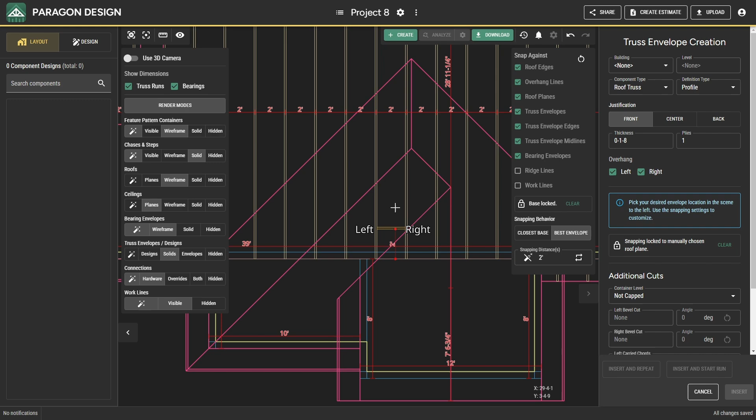Insert a truss again using either the lock to base method or snap against the bearing envelope, whichever works best for this situation. Next, add top and bottom cuts. As you can see, cuts can also be applied directly in layout mode. Once done, recalculate.

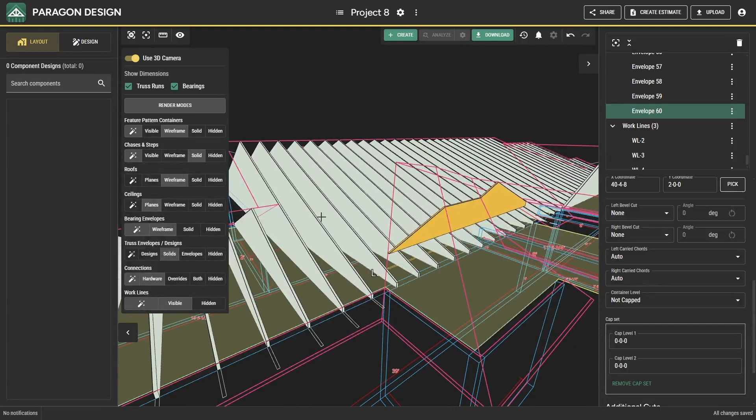Now check the 3D view. That looks good. Just fill in the missing areas here and the profiles look correct.

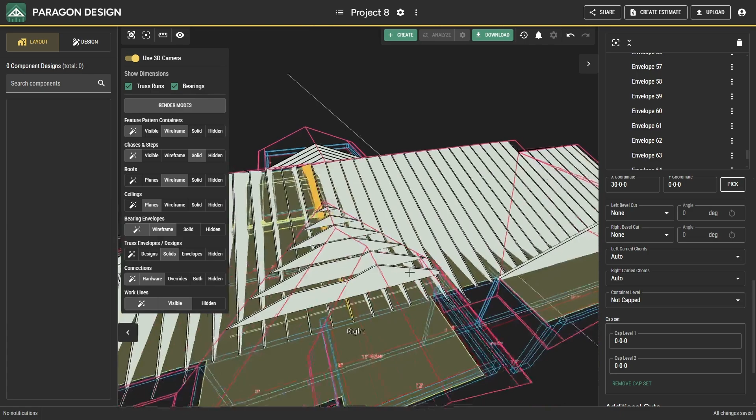There's one more valley truss run needed here, and then we'll be ready to move forward. Just like before, repeat the same steps in this area.

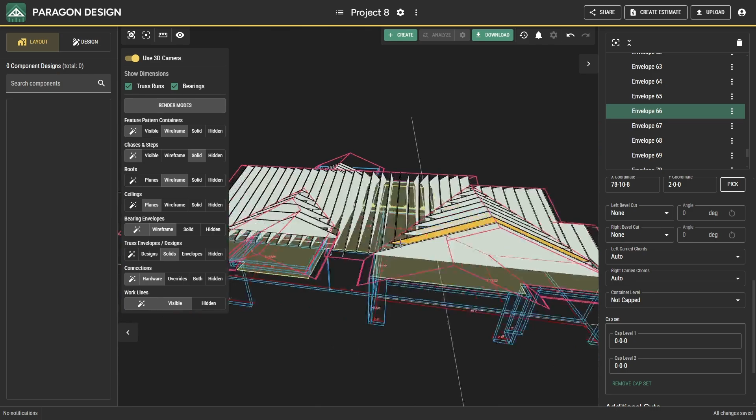Let's do one final check on the valleys. Looks like everything is correct. We can now move on to adding corner sets. To do this, right-click and select Add Truss. Before creating the corner set, add a hip girder truss first.

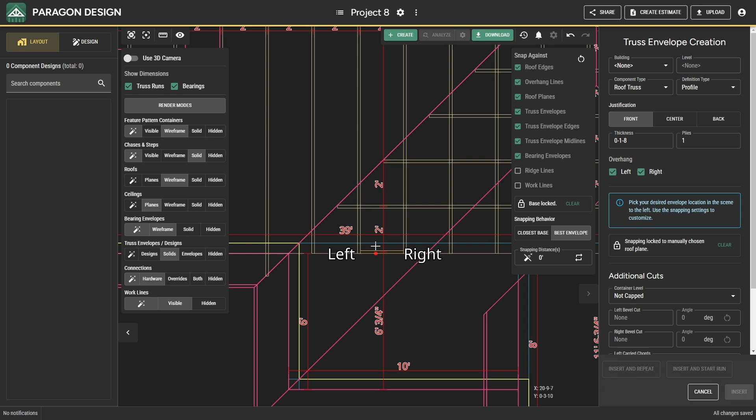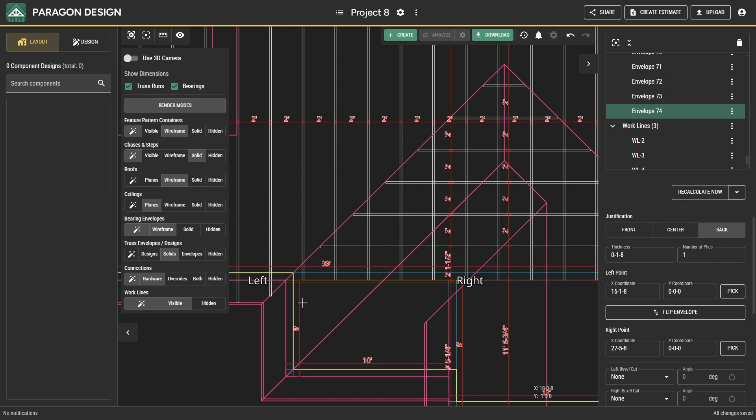Adjust the span to the correct length. Then, right-click on the hip girder and select Create Corner Sets. Next, select the two planes that define the corner set. Once selected, the corner set is generated.

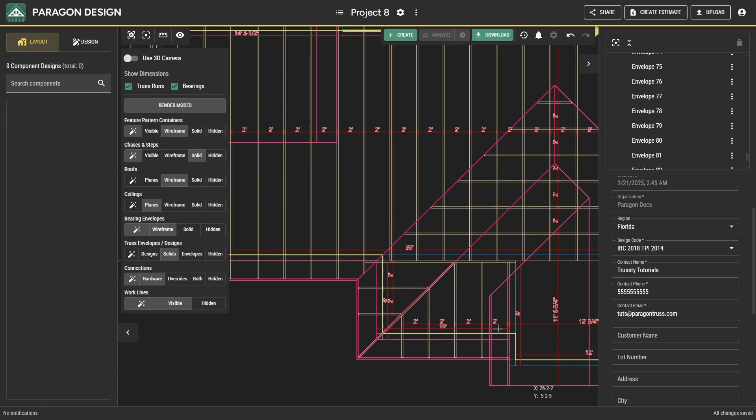To complete the trusses, fill in these missing areas. Make the necessary span adjustment on this truss, and now the corner sets are successfully added. Now check the 3D view to ensure the profiles are correct. Examining the profiles, everything appears to be right.

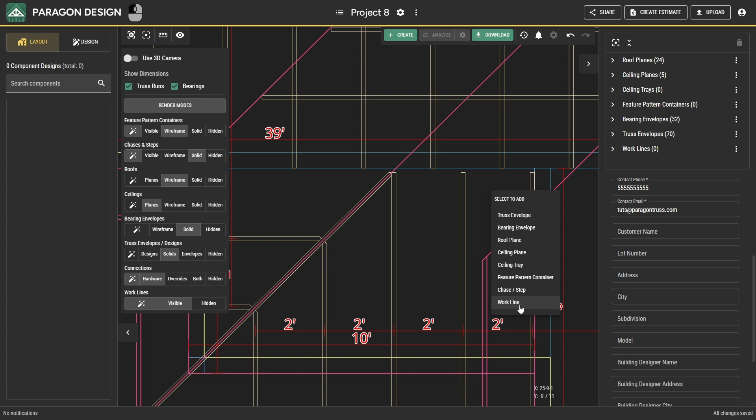However, the hip girder here might overlap or cannot properly bear on this beam. We could resolve this by deleting the girder and extend these trusses so they bear directly on the wall. The result should look something like this.

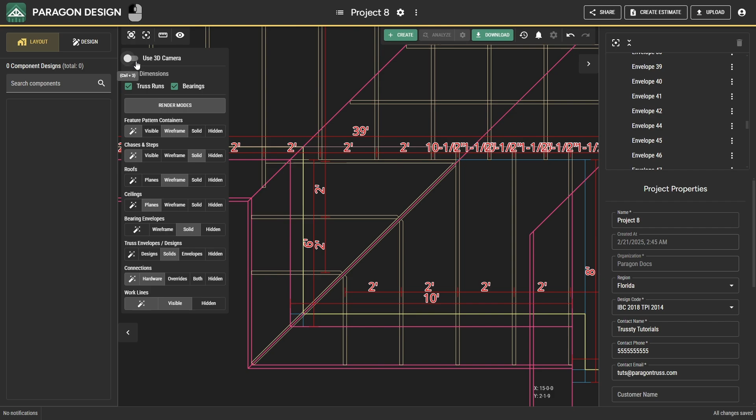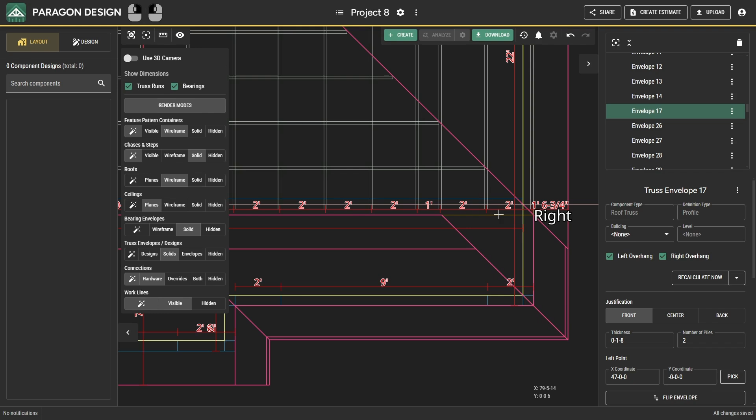Now, follow the same process for this side. Since there's already a girder here, simply right-click on it and select Add Corner Sets. Select the two intersecting planes to generate the corner set. Fill in any remaining areas, then place a truss girder here.

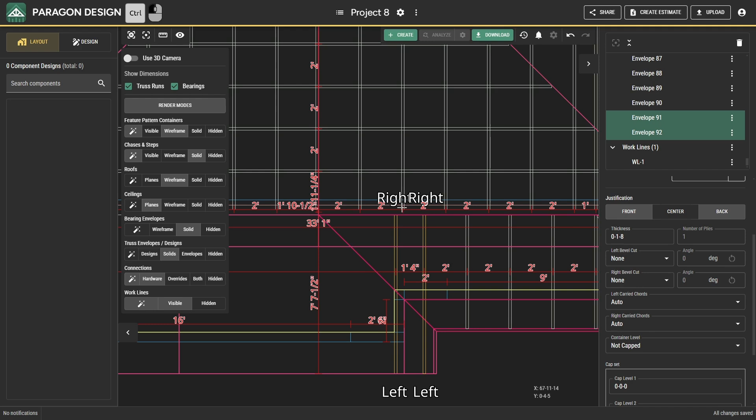Ensure that both trusses share the same left and right points if you are adjusting the ends using a bounding work line. To align them, simply flip the truss envelope to align their endpoints. Now, both trusses are aligned properly. Adjust the span of these trusses as needed. Remove any existing work lines to prevent unintended extensions, add a bounding work line, and recalculate.

Now, let's complete the remaining trusses and make any necessary adjustments to finalize our layout.

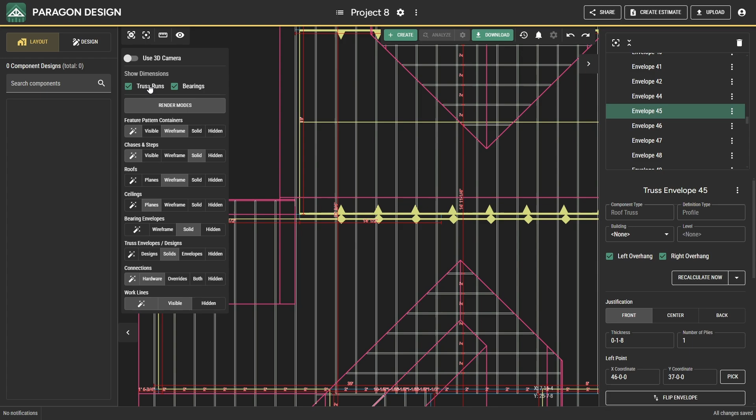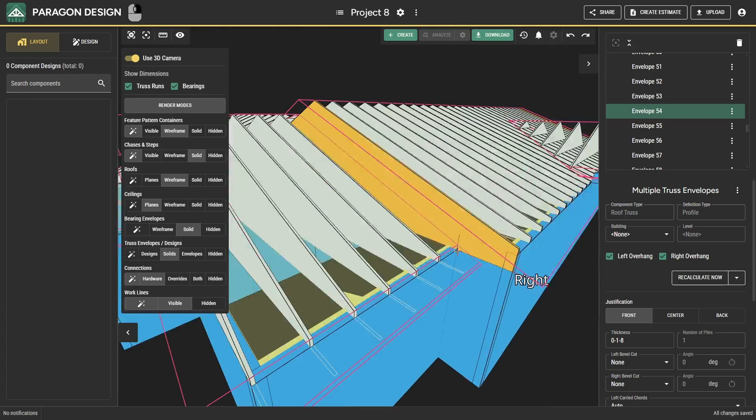Since the overhangs can be adjusted during the design phase, we'll leave them as they are for now. As for these gable trusses, we'll refine their profiles once the rest of the trusses are designed. This approach provides greater flexibility in managing various levels of layout complexity. Doing one final check.

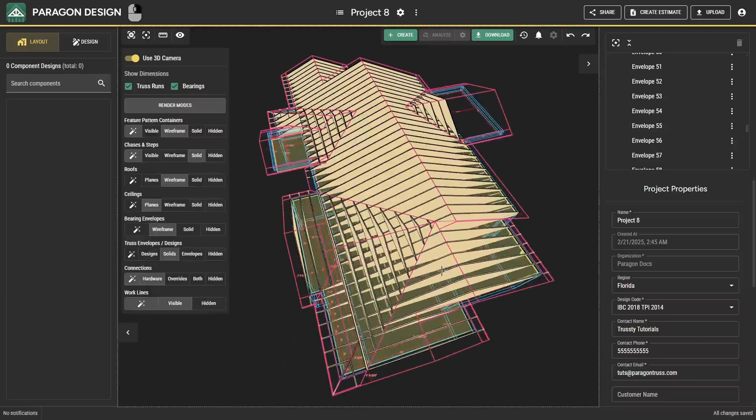Everything appears to be in place. If your project requires piggyback trusses, here's how to add them. Select the trusses that need a piggyback section. On the right sidebar, scroll down to the Cap Set section. Under Cap Level 1, set the cap height to your preferred value.

Since this height is referenced from the zero elevation, you'll need to add the top height of the wall where the truss envelope bears, plus the desired overall height for the base truss. If an unusual truss envelope appears, simply adjust Cap Level 2 to a higher elevation to correct it. Now that everything is set up properly, we can proceed with designing all trusses.

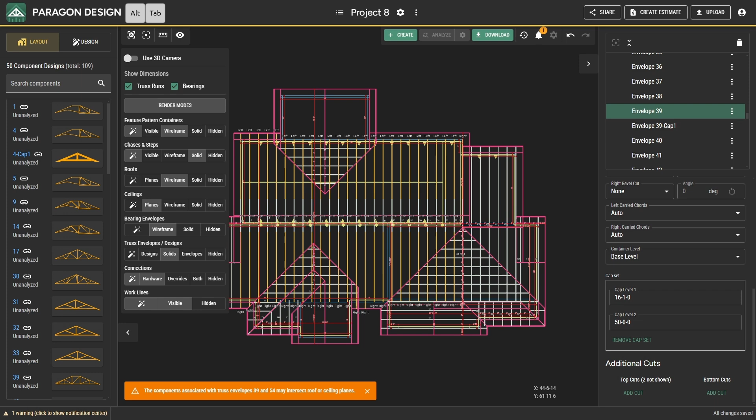Remember this error for later, as we'll address it in the next steps. For now, switch to the 3D view to check how the designs look. To view the truss designs, click Designs. Here, the trusses have automatically generated webbing.

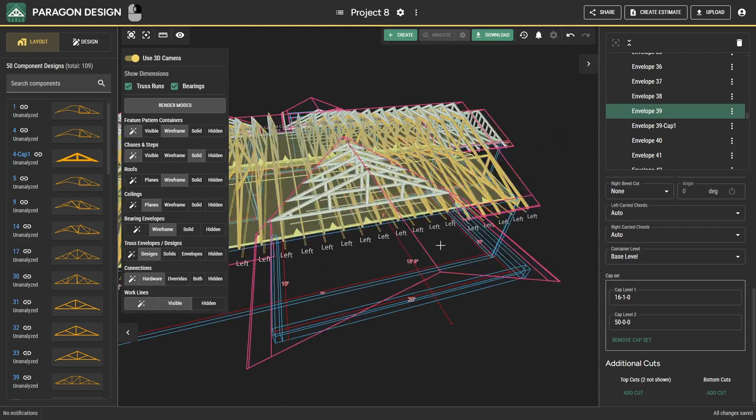These configurations can be adjusted in design mode, so be sure to watch the tutorial on how to use Paragon's design tools. The valley trusses, cap sets, corner sets, gables, and sloped bottom chords are now visible.

Now, we'll fix the profiles of these two gable trusses. To do this, duplicate an existing truss design that matches the problem truss and link the component copy to it. Next, ensure that the endpoints of the problem truss and the reference truss match. If they don't, adjust them as done earlier.

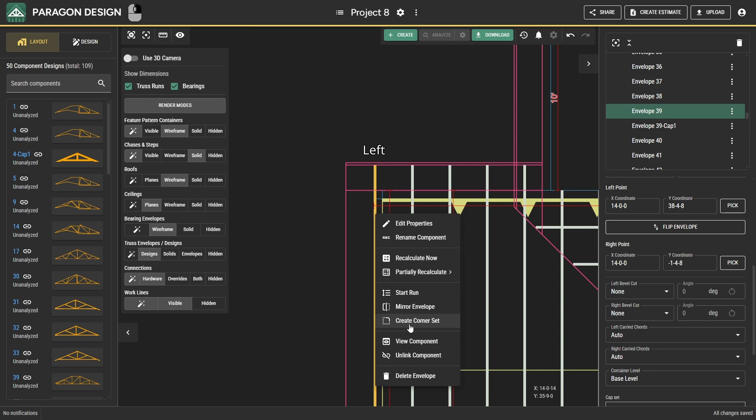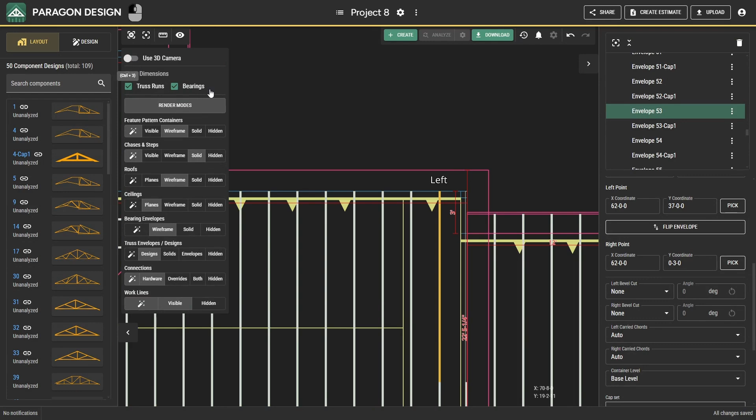Next, unlink the design of the problem truss. Looking good? Verify that the endpoints are now matching. Let's unlink this one as well. Open the reference truss that will be used to copy. View the component design and make a copy. Take note of the component name for later use.

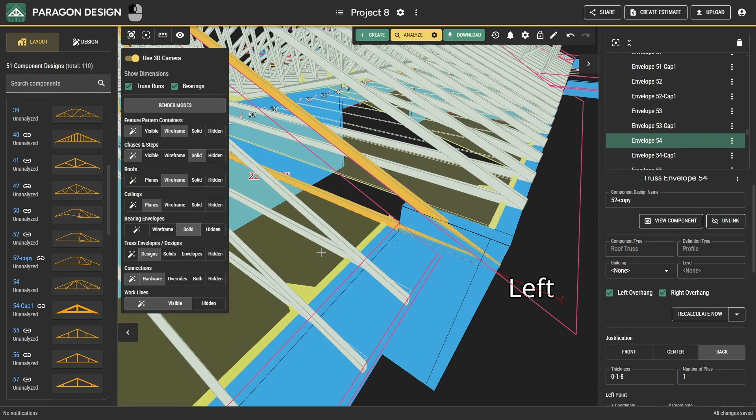Now, link this copied design to the problem truss. Click Choose Existing Design and select the copied component. Switching to 3D, the design has been correctly applied, but the elevation is incorrect. To fix this, add a bottom cut on the truss envelope, cutting against the higher flat ceiling plane.

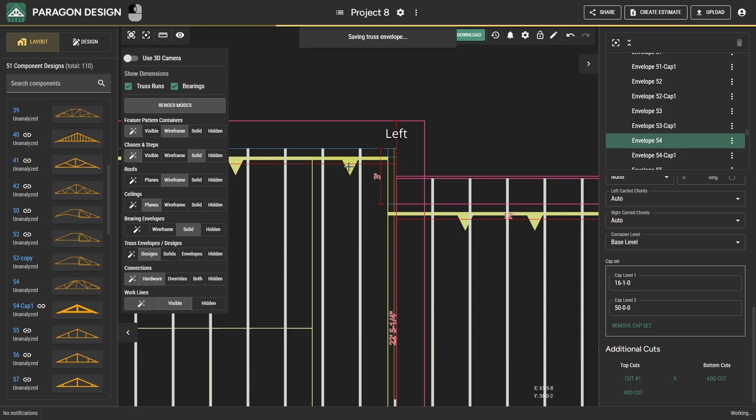Unlink the truss again. Add a bottom cut. Click on this plane, and then relink the design. Now the profile looks correct.

Apply the same fix to the other gable truss. If the webbing differs, you can create another copy of the design and link it accordingly. For now, we'll simply link the same truss since modifying component designs in design mode is discussed on other videos, which you can find in our channel and documentation page.

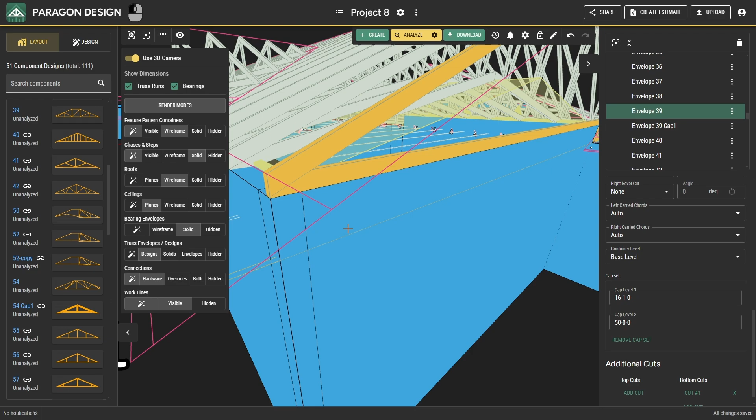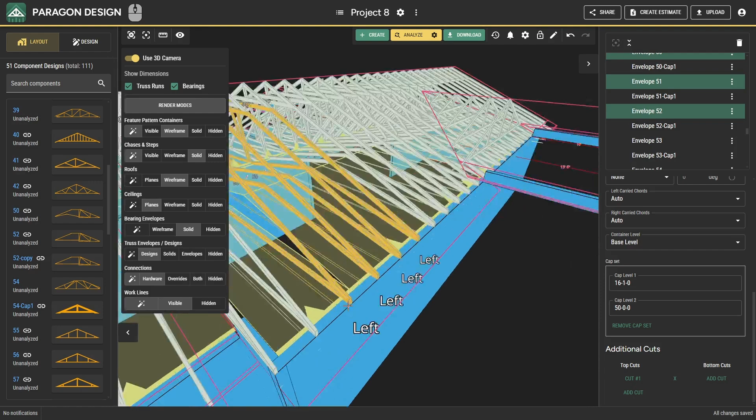Now, I will briefly go over how to fix overhangs in design mode. Open the component design, and since this is the left end, adjust the left overhang. Click this button and select Adjust Overhang. Checking the 3D view, the overhang is now correctly applied. Let's continue reviewing other areas.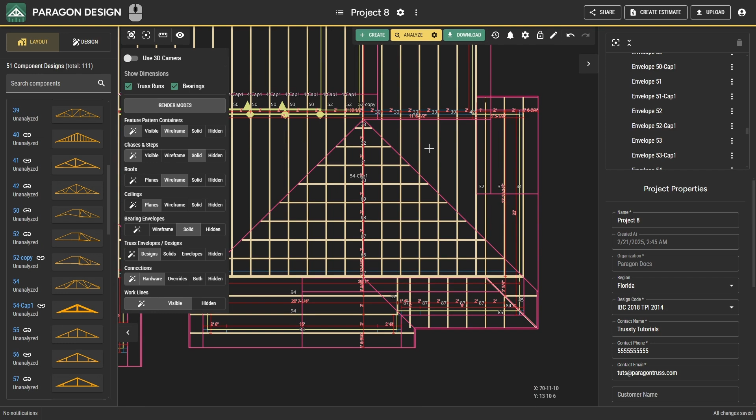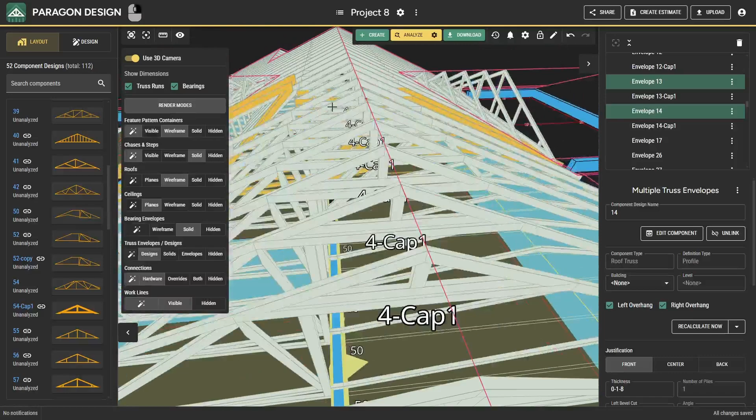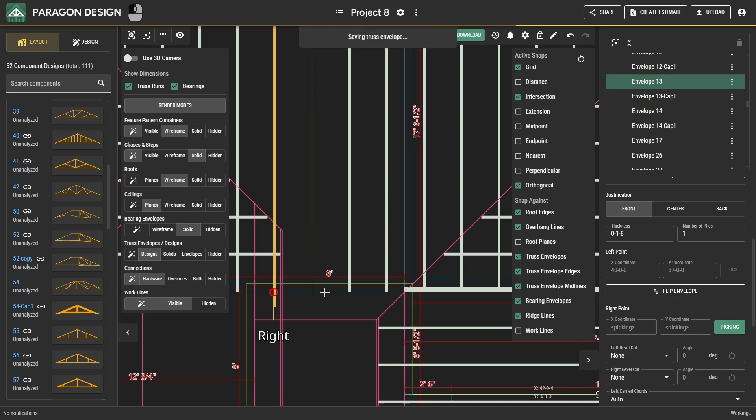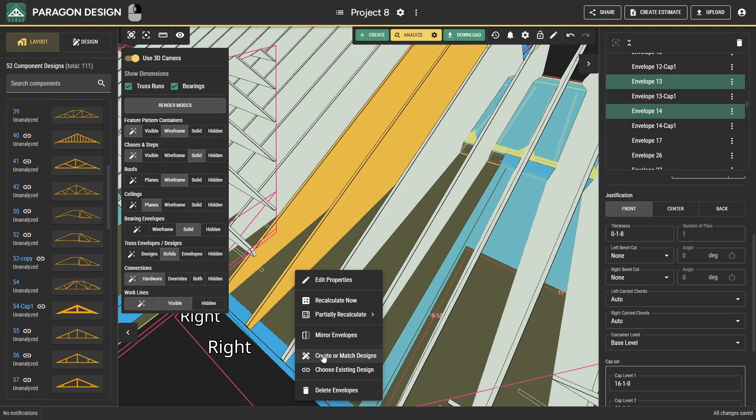Remember the error noted earlier? This is where it occurred. The truss extended beyond the roof plane. Fix it using the same method discussed earlier. Looking good? Let's continue fixing other trusses.

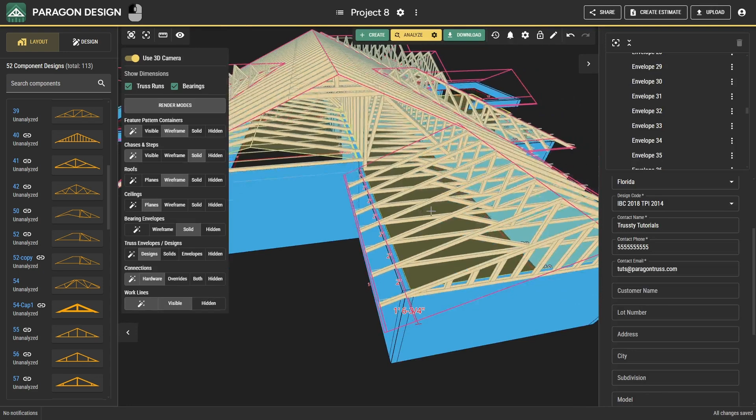Now that everything is good, we can proceed with the tutorial on creating floor trusses in layout. Note that we replaced the structural plan's specified material type only for demonstration purposes in creating floor trusses. Now, input the wall dimensions according to the plan, then insert reference lines to mark the boundaries of stair openings where the girder will be placed.

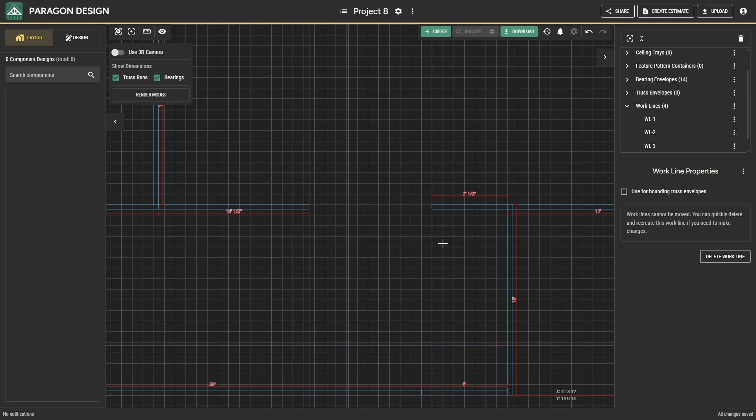We'll use a bounding work line for the horizontal girder that will be added later.

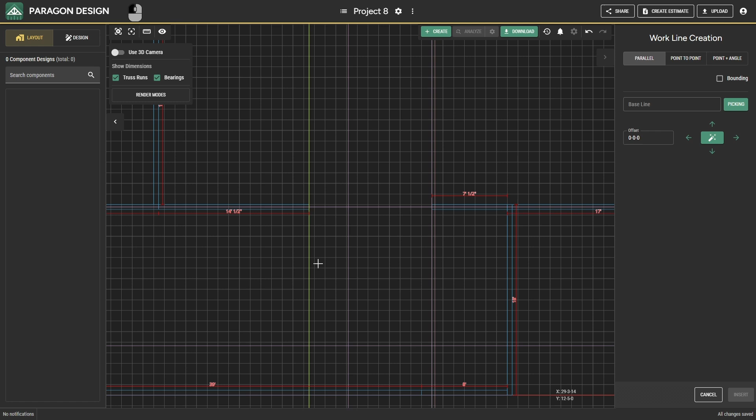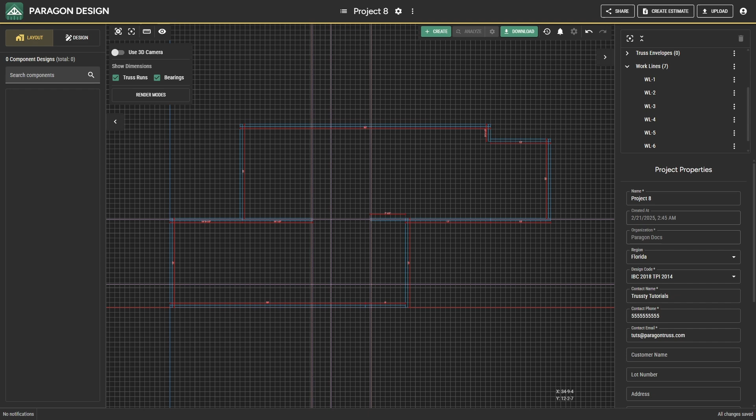Everything looks good so far. Let's proceed with adding floor trusses. The process of inputting floor trusses is similar to roof trusses. However, floor trusses require a feature pattern container to be added in the layout. To create one, right-click and select Feature Pattern Container.

Next, set the bottom height, which should be the top height of the wall where the envelopes will rest. Then define the top height by adding the required floor depth according to your plan. Once that's set, define the boundaries of the container by selecting the necessary edges. And the container will look something like this.

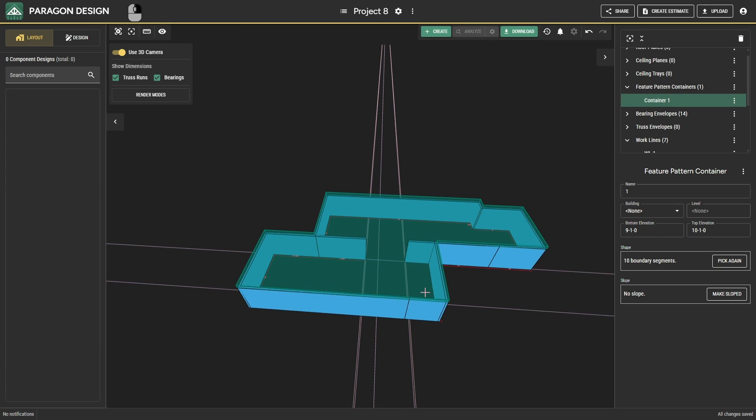Now that the container is in place, we can start adding floor trusses. To add a truss envelope, right-click on the container and select Add Truss Envelope. Alternatively, if the container is turned off, you can right-click on the layout, select Truss Envelope, and then change the component type to Floor Truss. We'll first insert the girder here, then proceed with adding the rest of the envelopes.

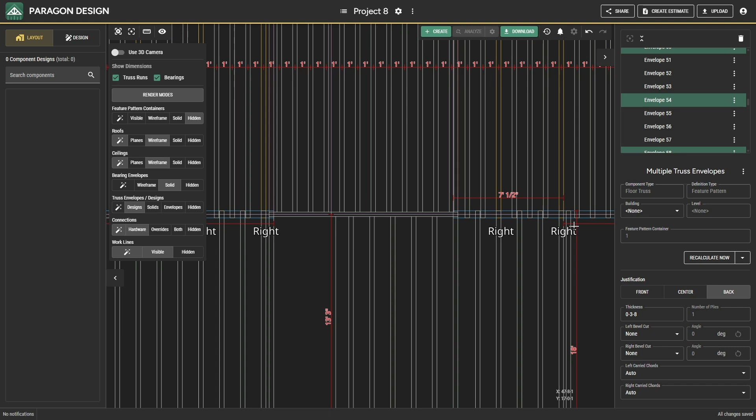Notice that some trusses are overlapping. Before designing them, we need to adjust the bearing size of the shorter span truss to 3 inches. This ensures the software automatically sets the endpoint of the shorter span truss to use top chord bearing on the longer truss. Use a bounding work line, then recalculate the truss to apply the adjustment.

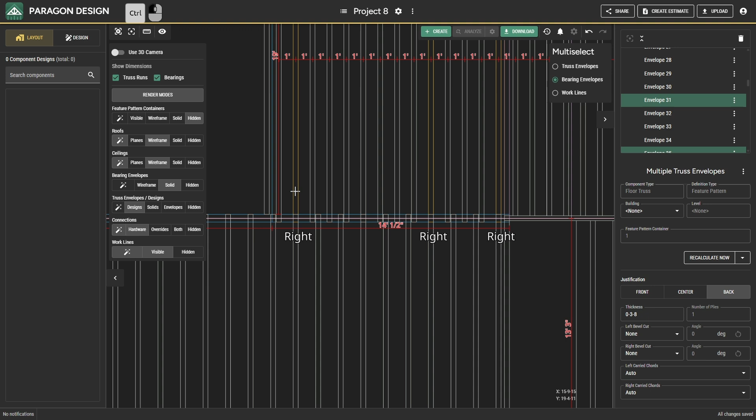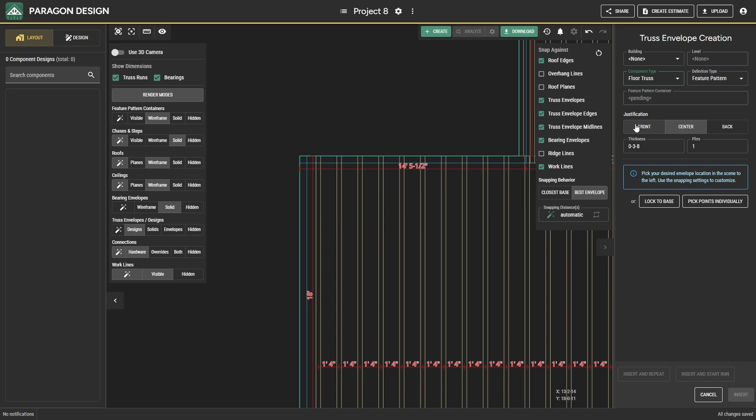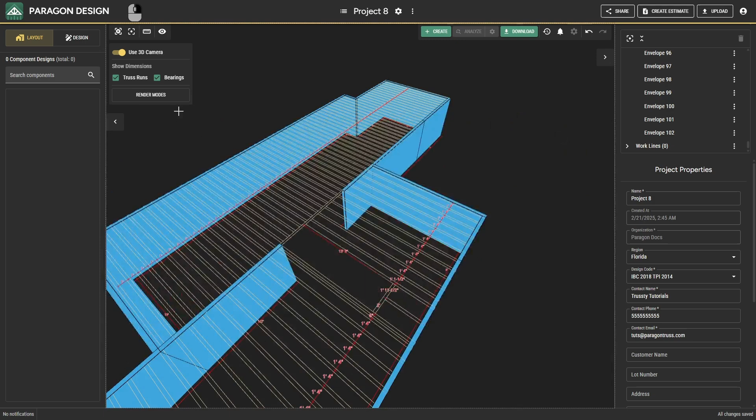That looks good. Let's continue adding truss envelopes on missing areas. To view the profile of the floor truss envelopes, enable the Solid option here. This will instantly update the display, allowing you to see the profiles clearly. After filling in the missing areas, we can move on to designing the trusses.

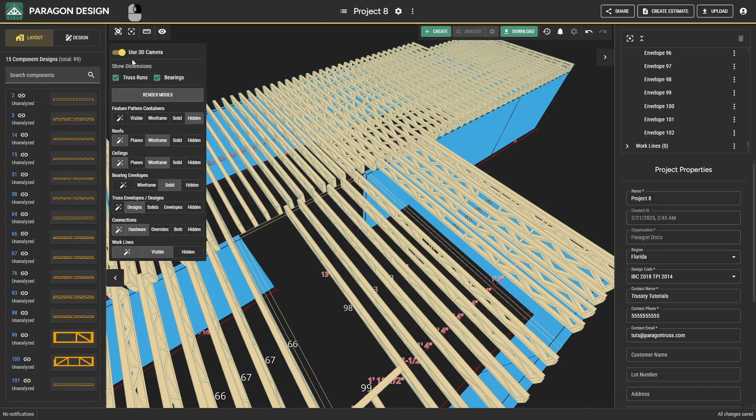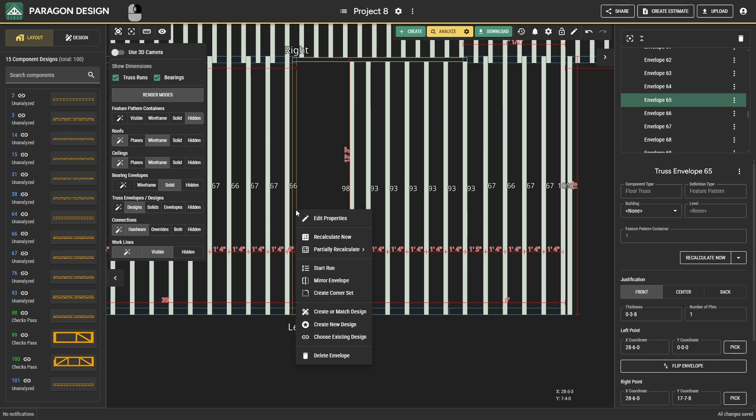Now you'll see that some girder trusses haven't been generated. This happens because the trusses bearing on them haven't been analyzed yet. To fix this, we need to analyze them first. Before that, let's combine this truss with its adjacent truss. Now analyze each truss that requires it. We'll also combine this truss with the one next to it.

Now that all the girder trusses bearing on this girder have been analyzed, we can proceed with generating the truss girder. Just make sure to analyze any remaining non-girder trusses that are bearing on this girder first, as the software will not allow you to analyze the girder until all bearing trusses have been analyzed.

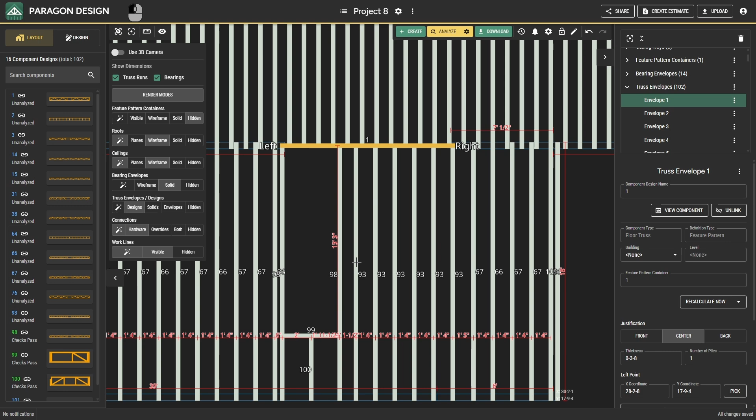It looks like the girder has successfully generated. Let's do one final check in 3D view. Going back to the overlapping trusses, they now appear correctly bearing on each other. And that wraps up this tutorial on creating a complex layout.